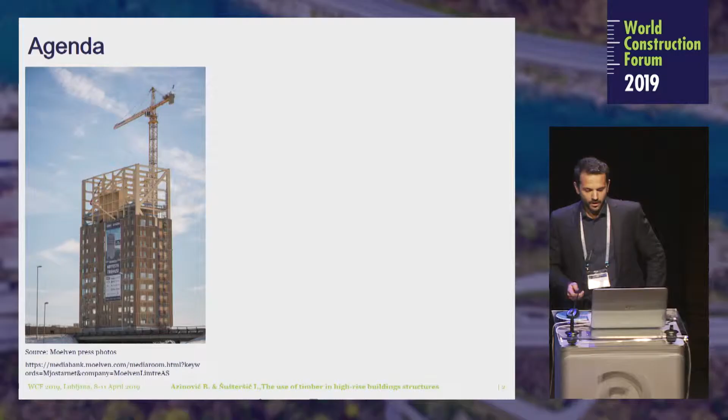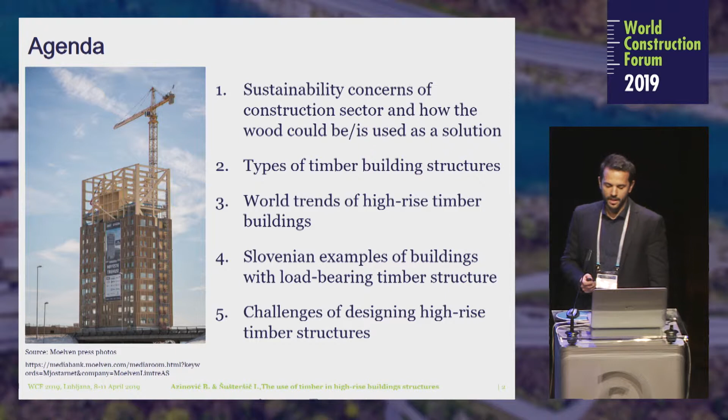This presentation consists of 5 main points. First, I will present some facts on sustainability concerns of the construction sector. Then I will present different types of building structures, followed by the world trends of high-rise timber buildings and some Slovenian examples. In the end, a few challenges in design of timber buildings in practice will be exposed.

The construction industry is the top global consumer of raw materials. The industry generates between 25 to 40% of the world's carbon emissions and approximately 50% of all solid waste. This volume of natural resource utilization is not sustainable and could compromise the environment for the sake of growth.

Additionally, the increase of population in urban communities poses a growing challenge to the construction industry. Achieving targets for global carbon dioxide emission reduction demands smart planning and sustainable design, which could reduce energy consumption and pollution.

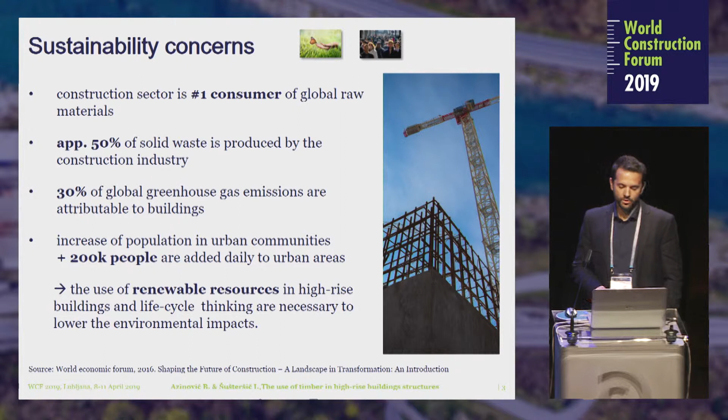One of the possible solutions for more sustainable design of buildings is the use of timber. Timber is one of the building construction materials that is poised to make rapid advances in the next decade or so through prefabrication. It's easy to install and generates almost no waste. On the sustainability side, timber can lower a building's carbon footprint by sequestering the CO2 used during construction.

Integrated into prefabricated building construction, timber can be used in a closed-loop cycle. The timber offcuts from the manufacturing can be used to power the manufacturing plant, and when buildings are demolished, the carbon can still be stored in reused or recycled materials.

Compared to traditional construction, procurement of timber elements requires a greater level of coordination earlier in the design process. Prefabrication of panels in a factory offers accuracy and quality, optimizing material use while vastly reducing site waste, and therefore, all in all, is a well-suited material.

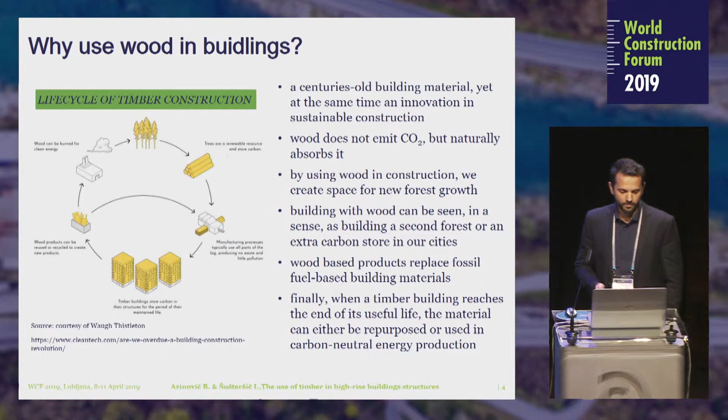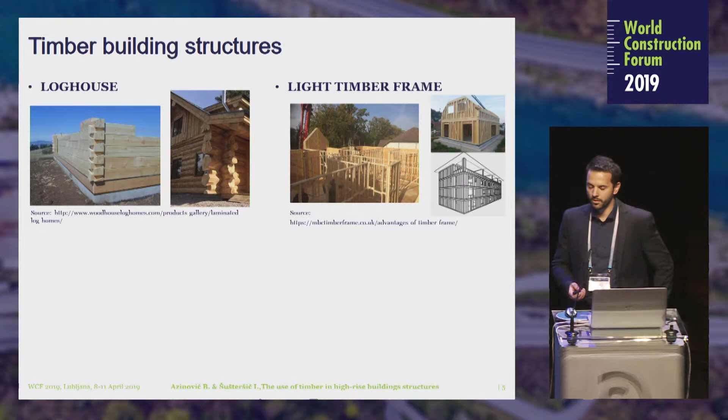Now let's look at some of the possible options of timber building structures. The first use of timber in modern housing was assembly with logs into a so-called log house. More advanced structures which are being used mainly for low-rise timber buildings are light timber frame structures.

Furthermore, it's possible to resist lateral loads by using moment-resisting frames around the perimeter of the building. Then finally, the approach which is most commonly used in Europe is with cross-laminated timber, or CLT, walls and floors. Cross-laminated timber is a building material that was developed some 25 years ago. It consists of a number of solid timber boards which are glued or nailed together crosswise.

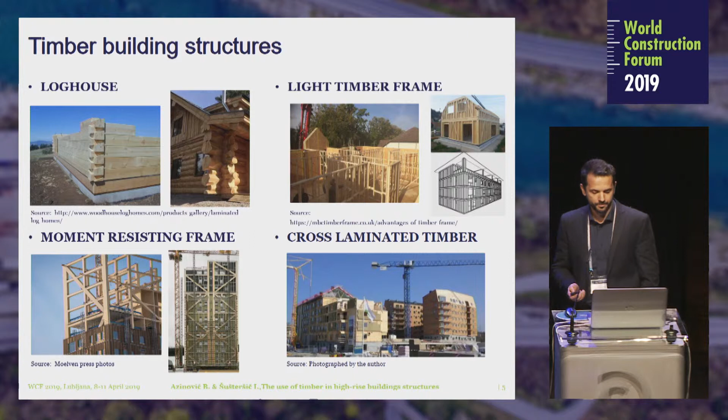In recent years, several high-rise building structures were constructed where timber elements were only a part of the load-bearing system. Such buildings are considered as hybrid buildings, where particularly combinations with reinforced concrete and steel are possible.

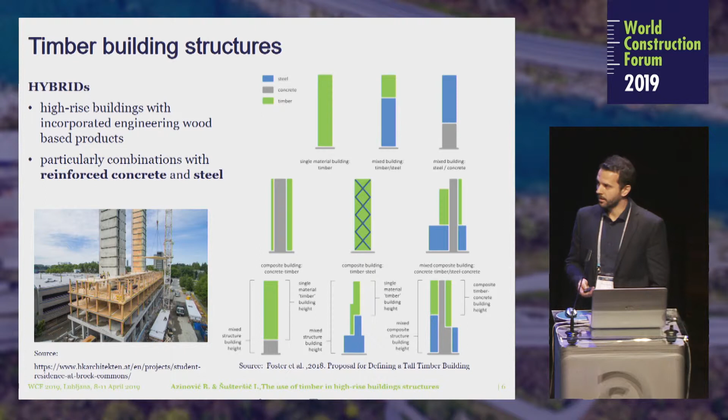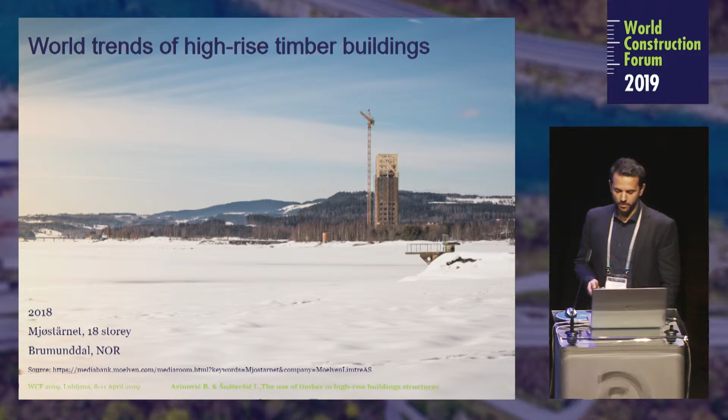In the next section, we have prepared a quick overview of the already constructed timber and hybrid building structures. On the picture above is the Mjøstårnet, an 18-story building with moment-resisting frames and CLT walls and floors. This structure was finished last year and is located in Norway.

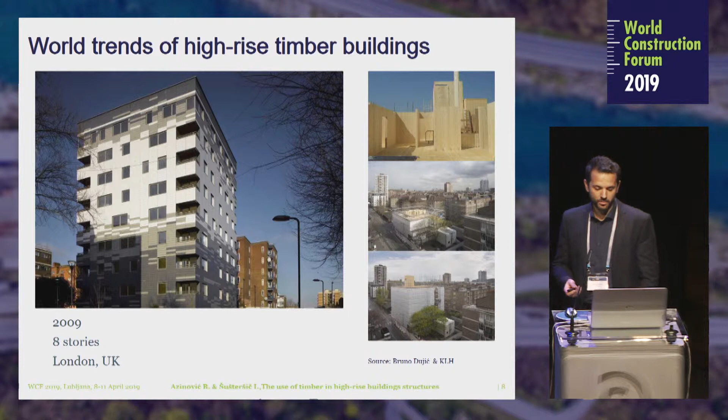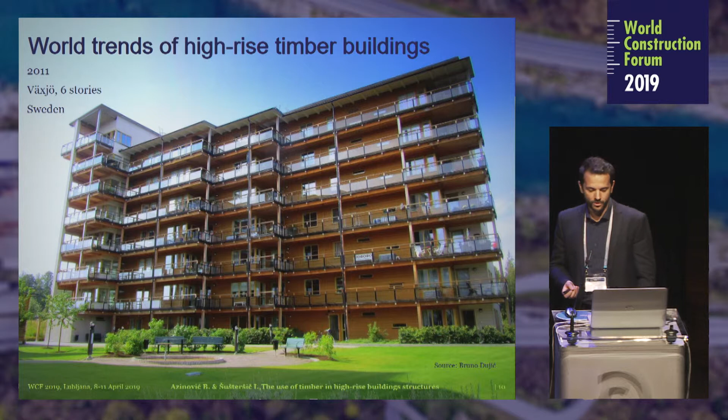Starting chronologically, one of the first high-rise buildings with cross-laminated timber was constructed in London in 2009. Another hybrid building with CLT was a 6-story apartment building in Berlin. Constructed in 2011 was the Limnologen in Sweden, which is a combination of CLT and light timber frame structure. Then there's a 9-story hybrid building in Milan, constructed in 2013.

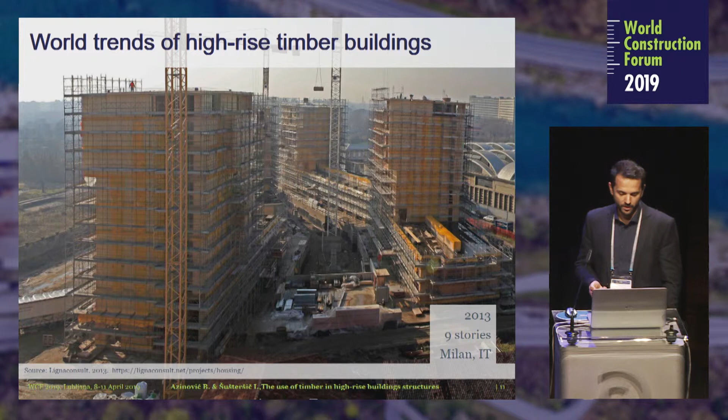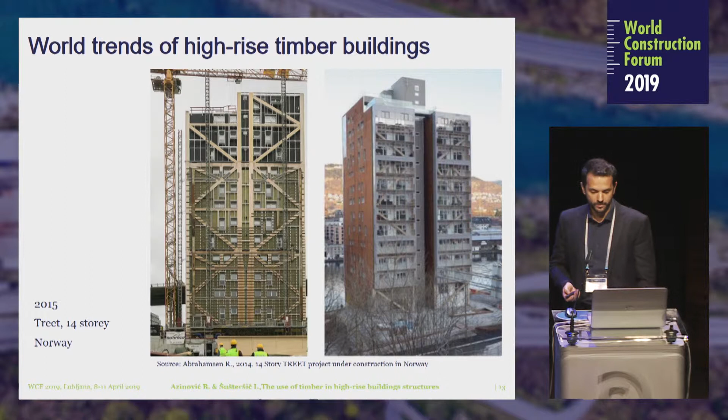A 10-story CLT building in Melbourne. A 14-story building in Norway with glulam mega frame around the perimeter of the building. And some more recent examples: the 10-story apartment complex in London, and the 18-story hybrid Brock Commons building in Canada.

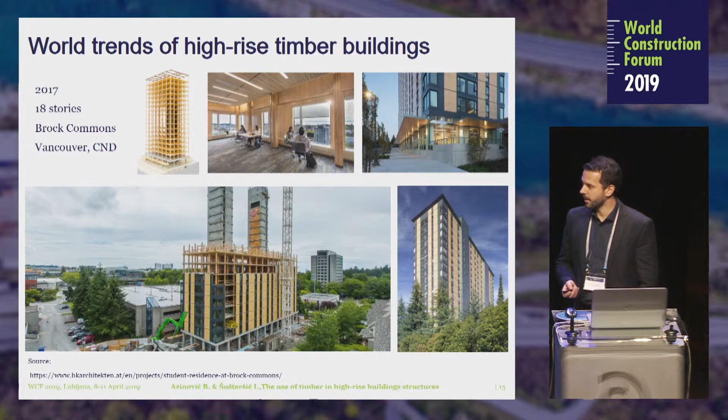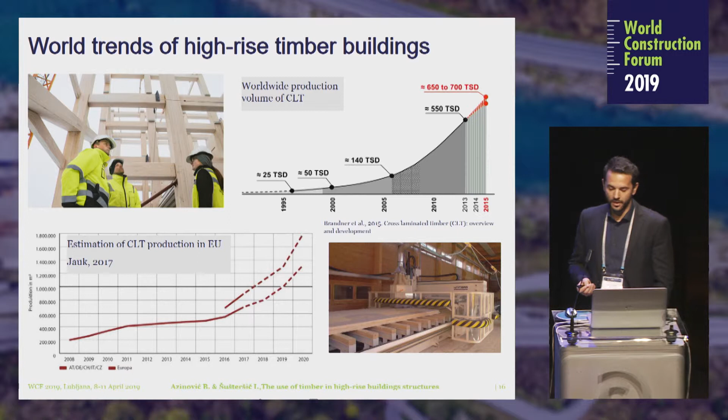As seen from the brief overview, multi-story timber construction has evolved tremendously during recent years. An important factor has been the development and wide acceptance of CLT as a reliable, efficient, sustainable, and versatile material. On the graph above, it's clearly evident that the worldwide production in volume of CLT has risen almost exponentially. This is in close correlation with the trend of constructing timber buildings.

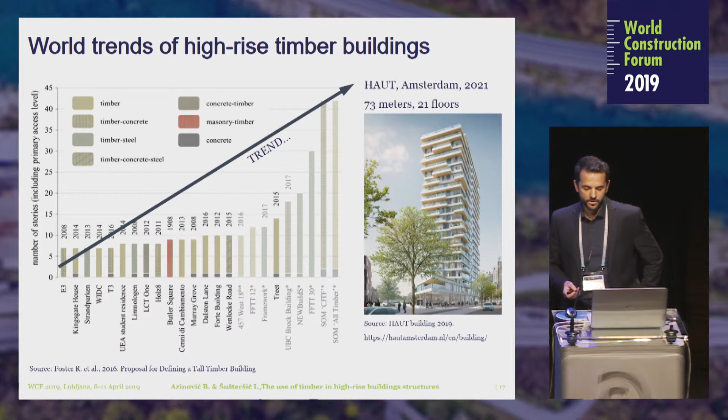The slide above is intended to show the development of high-rise timber and hybrid buildings. Some buildings with an asterisk are shown as concepts or planned buildings. Hopefully we'll be able to say in the future that this trend was followed and that our newly constructed high-rise buildings will indeed be more sustainable.

The use of wood as a structural material, however, often results in the introduction of other materials to achieve certain performance requirements. For example, concrete is often used to achieve acceptable floor vibration, and gypsum boards for fire resistance. Furthermore, critical elements of the design of most timber structures are the connections between load-bearing elements, which in most cases are steel or adhesive.

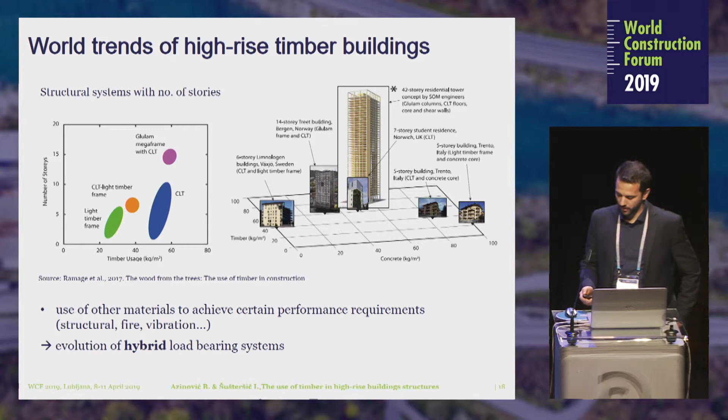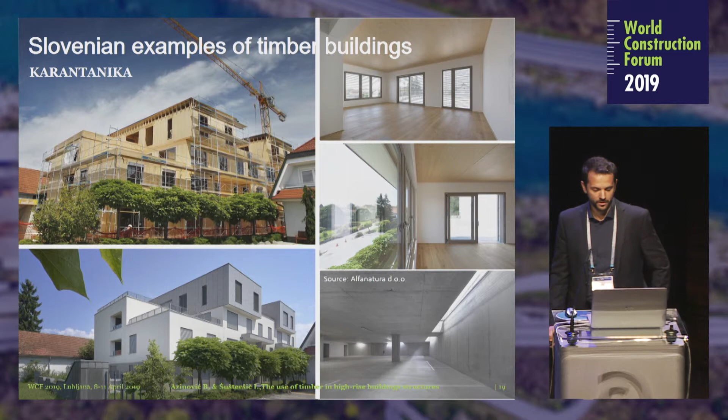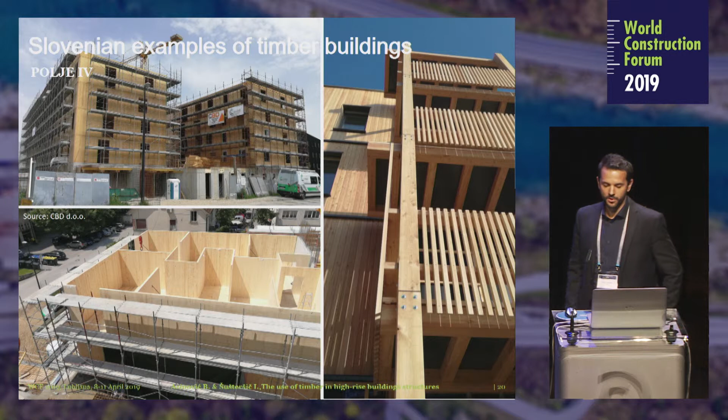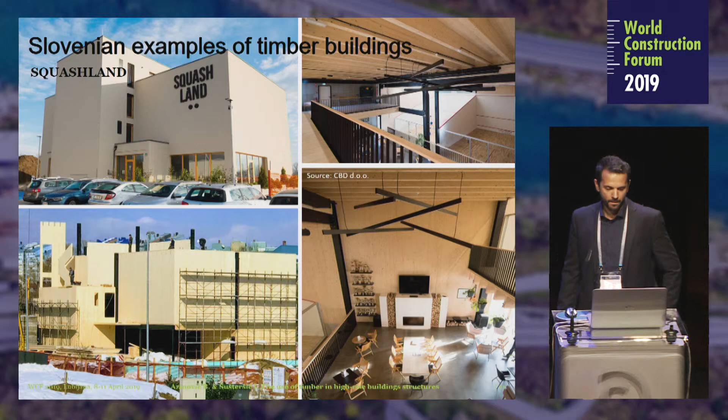Then there's a building in Polje with 5 stories, where the ground floor is made of reinforced concrete and 4 stories above from CLT. There's another CLT building, the Squashland, finished in 2018. The Eltima commercial building in Komenda was finished in 2012. It's worth mentioning that it was constructed in only 2 months.

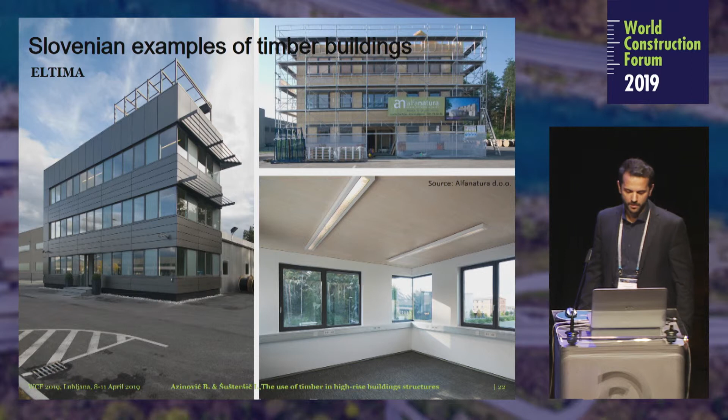One possibility I haven't mentioned yet today, but my colleagues have, is upgrades with timber structures. In 2010, a vertical upgrade with 2 additional stories was performed at Terme Čatež. The additional timber structure is lightweight, and therefore no strengthening of the existing masonry structure was necessary.

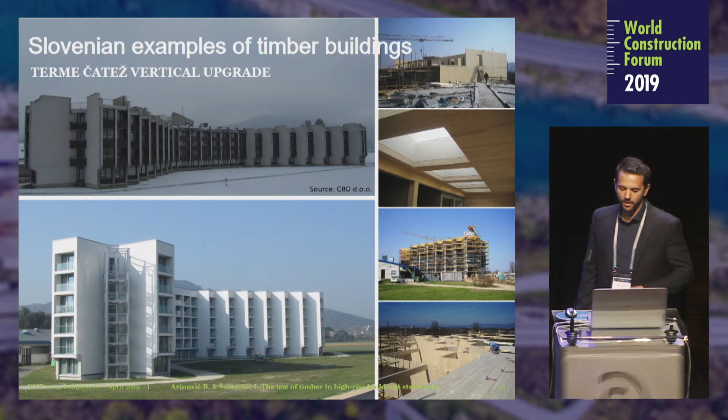For the last section, I'd like to show you some of the challenges in the design of timber buildings. One of the key points is definitely the protection of the main load-bearing elements against moisture. When exposed to wetting, wood is prone to degradation, microbial and fungal attack, and of course larger deformation.

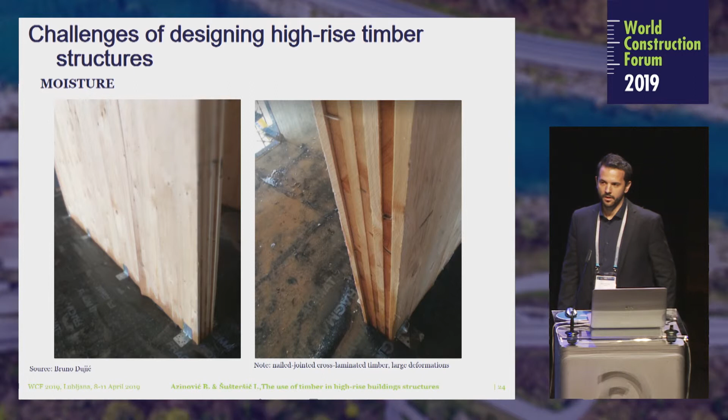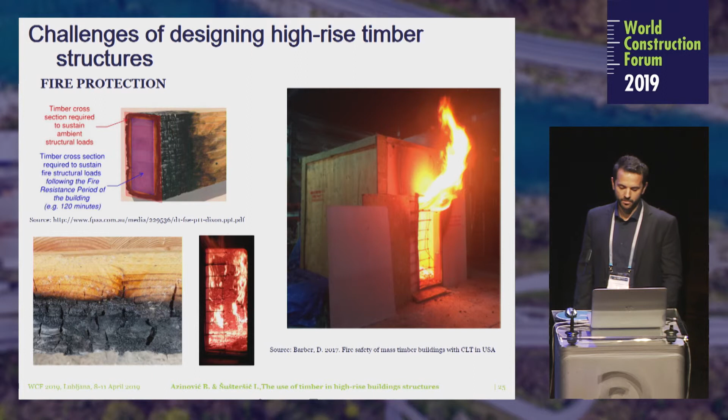Secondly, fire danger is always top of mind when considering a timber structure, especially since it's a combustible material classified in Euro Class D. During fire, steel connections are the typical point of failure, not the load-bearing elements themselves. The natural process of charring during a fire actually serves to protect the structural integrity of the material. This is not an open and shut case, however, and the discussion around this topic continues. It's worth mentioning that fire regulations usually govern the number of stories.

Furthermore, acoustic behavior is also a major concern, mainly due to the relatively low specific weight of timber structures. Problematic are all aspects of noise protection: airborne noise, structure-borne noise, and impact noise.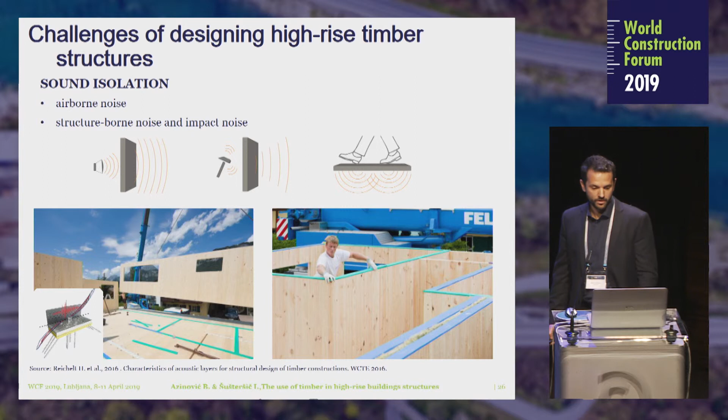In many European countries and worldwide, there's a high level of earthquake hazard, so earthquake loading is a key factor influencing the design of buildings. This issue is important also for high-rise timber buildings. In general, we could say these structures are lightweight, which is beneficial in case of earthquake loads. However, the response of mass timber structures is often rigid, characterized by brittle failure. Therefore, the design and development of dissipative connections for such buildings is crucial.

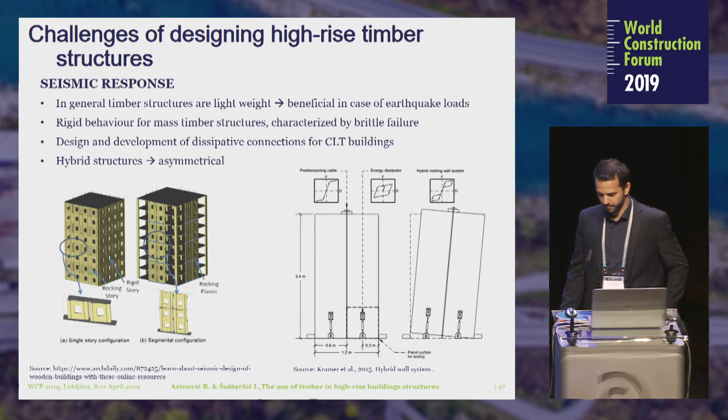Another issue worth mentioning is that hybrid structures are, by their definition, asymmetrical in their floor plan. The low mass of timber structures may be beneficial for seismic loading, however, on the other hand, not for wind. Ultimate limit state is usually not the problem, but serviceability limit state is, as the accelerations can surpass the code-prescribed limits.

Counteractions include stiffening the structure, increasing the mass of the structure on top, or installing tuned or active mass dampers. Current research is focused on measuring existing timber buildings, comparing the results to finite element models, and evaluating more precise damping values for different construction types and boundary conditions.

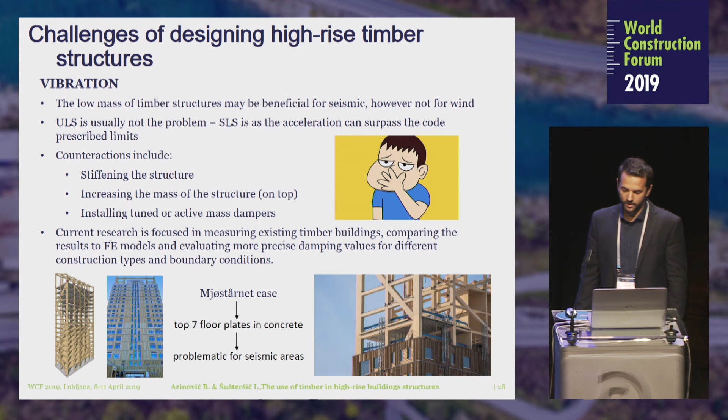Well, this was all from my side. I hope I was able to promote constructing with timber a bit in this forum. Thank you very much.